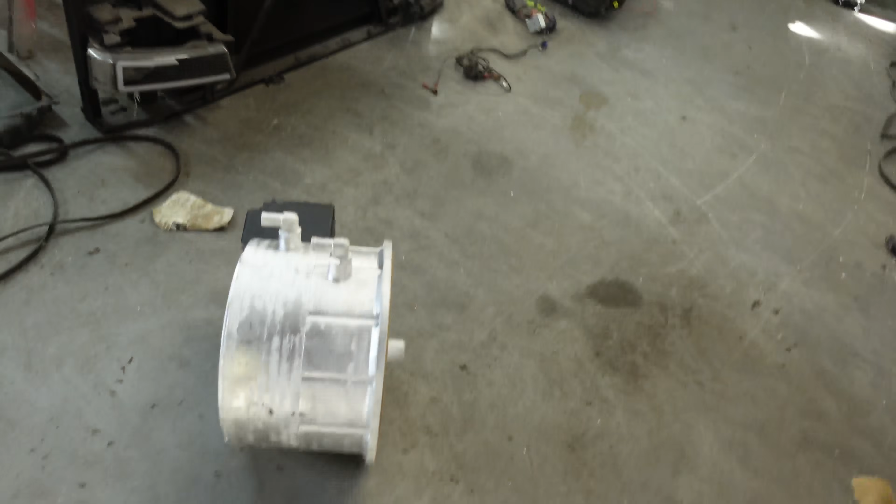Now that we can move the engine ahead because we're done with that manual transmission for the next stage of testing. And look at that, we have a generator here. I know it's not exactly what we need, but it is exactly what we need right now. Let's get into it.

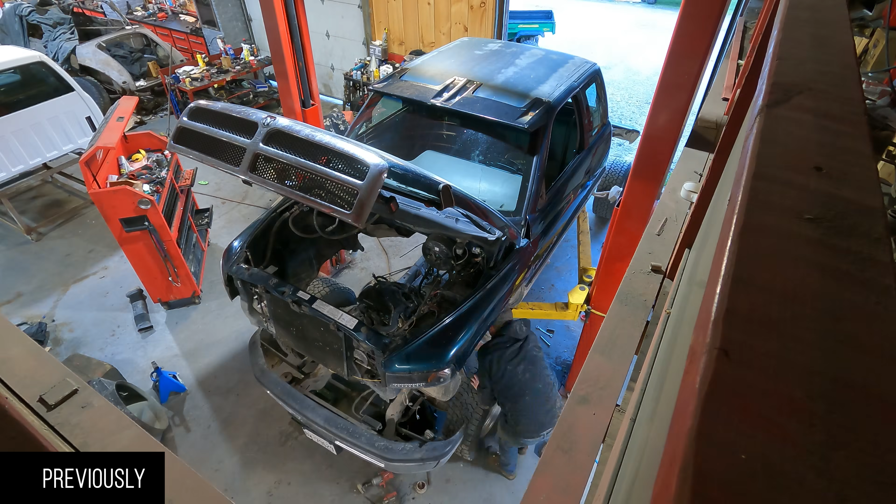First Cummins swap into a Dodge. I feel like we did a pretty good job on her. Definitely SEMA worthy. This is the process that we'll be using to put our electric motors underneath any and every single pickup truck that's been built in the last 6 decades.

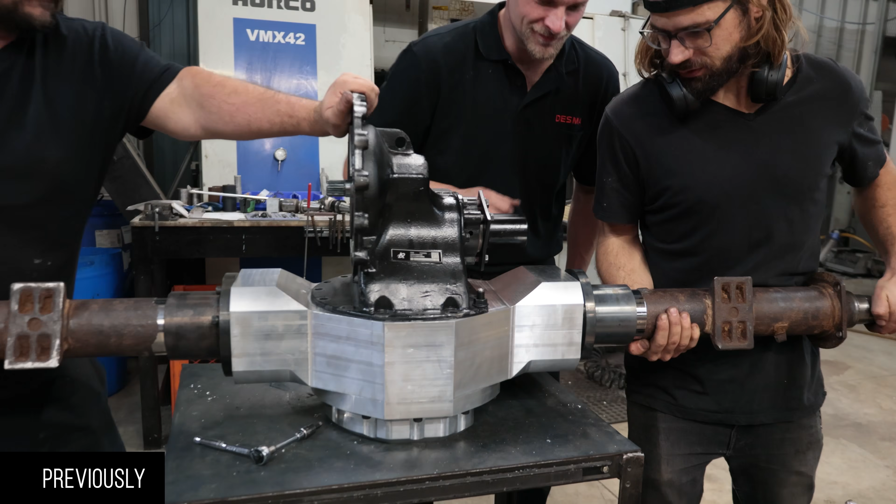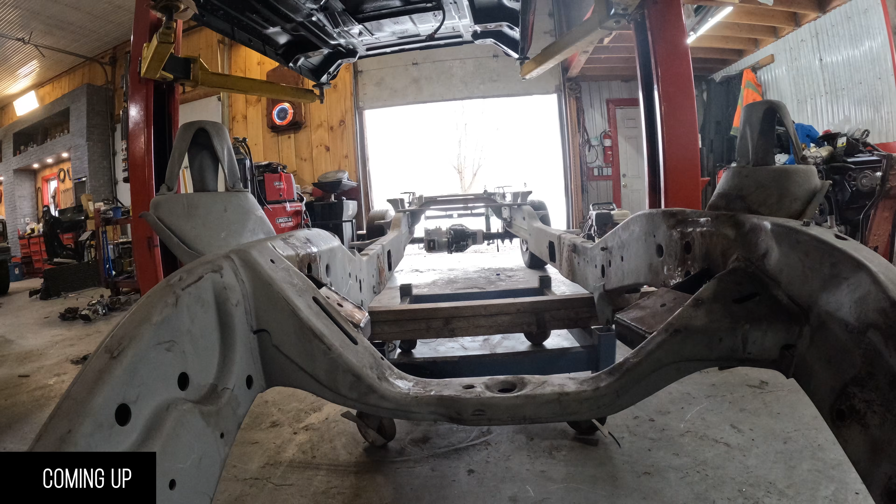Well, here goes nothing. Nice and easy, that's all I wanted to do, make sure that we had lots of room for the engine. We are getting some of the parts designed and made. That means we're waiting on parts. So there's only so much I can do, but we just had the batteries roughly sized, ready for our generator.

We just had this one mocked up. I'm really excited. I was a little worried about the color at first, but I think it is actually the perfect color. Can't wait to show you guys.

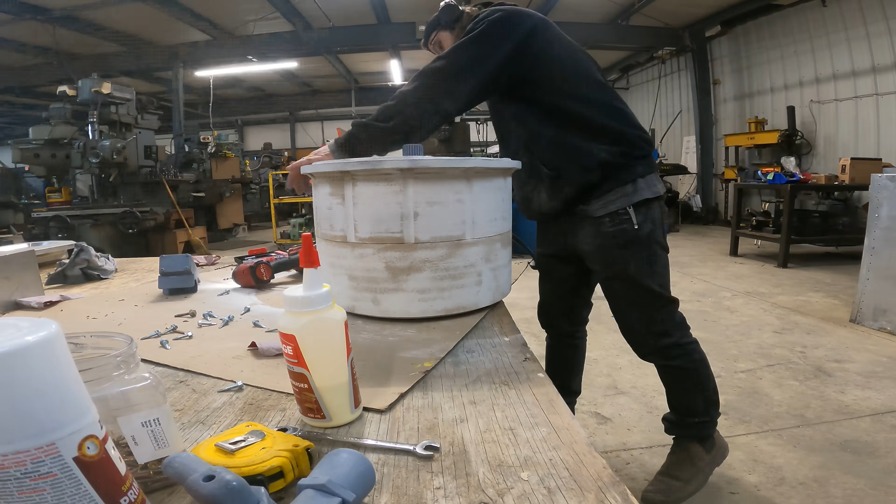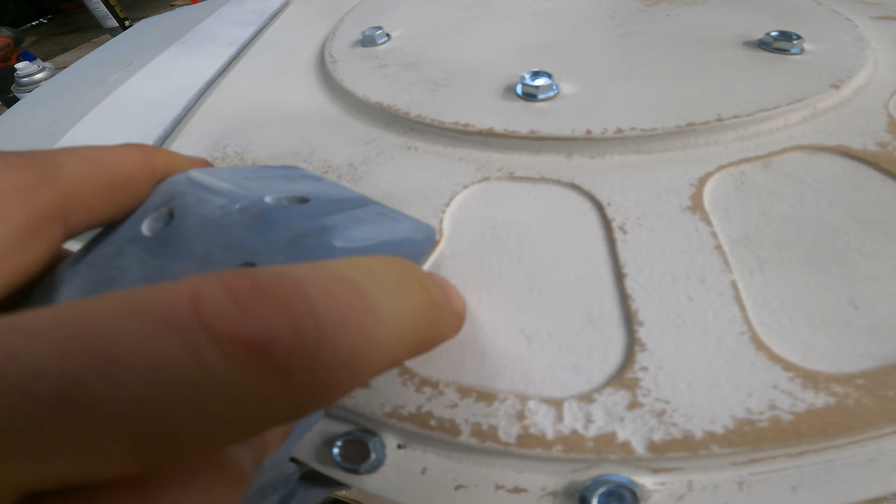All assembled, coolant lines, power out, control in. Looking pretty cool. Now we're gonna give it a coat of paint.

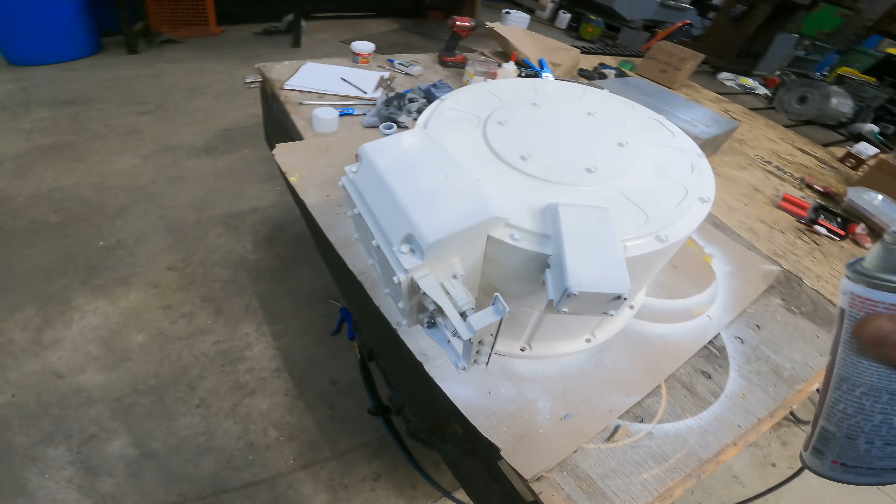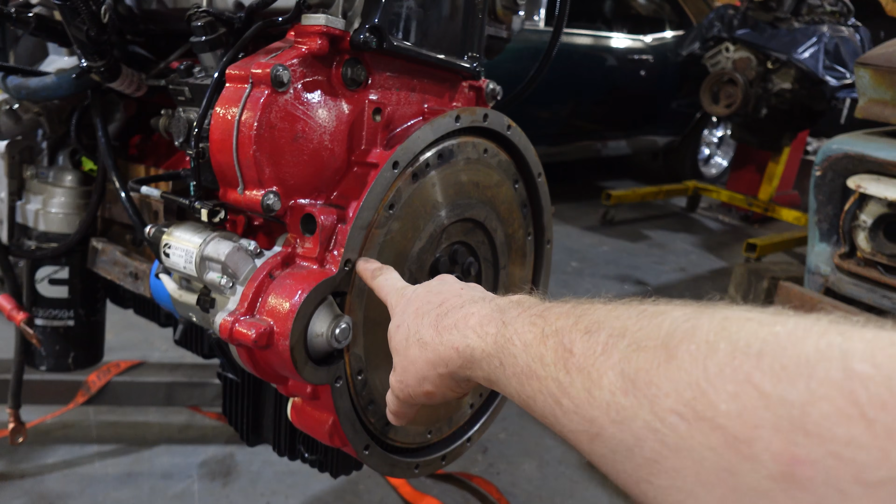So while TNK is making our generator for us, I'll show you that in a minute, but we need to change the bell housing on this 2.8 Cummins because Cummins likes to use their own generic bell housing for this, and it's completely round. It's just an odd size.

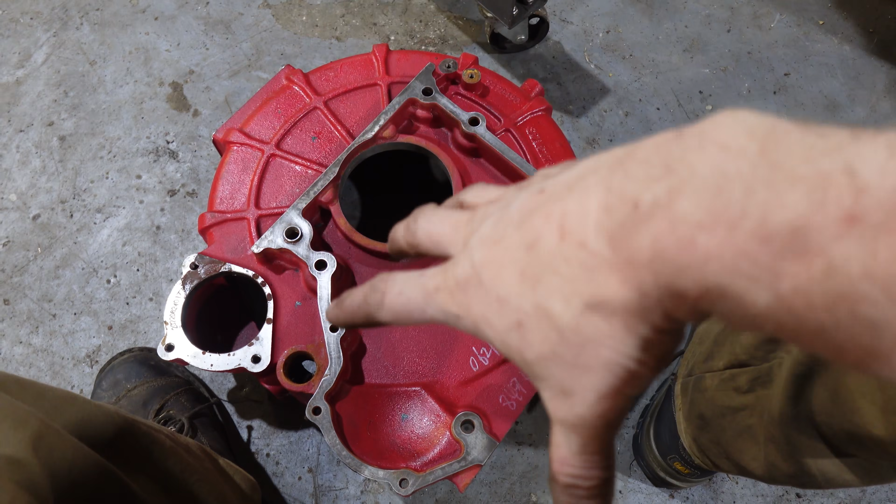So we have an SAE3 bell housing here, and that's more universal because our generator has an SAE3 bell housing. So we gotta pull this bell housing off. I'm not exactly even sure what's all involved in that, but it is sealed, and the rear main seal goes

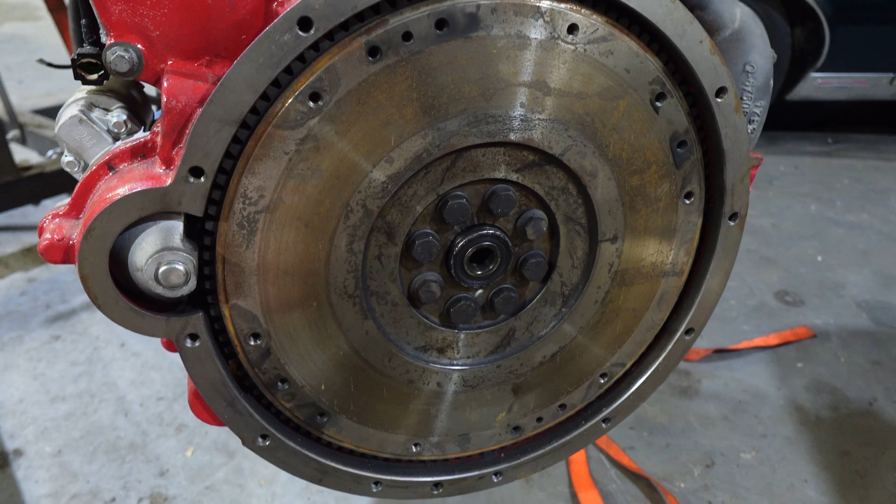in the bell housing. I hate that because it could have just been a nice simple bell housing, pop it off, put the casing behind it with the seal on it. Nothing wrong with that. It's just way more complicated than it really needs to be, but I'm not complaining. Let's take it off. Here we go.

Okay, so the timing chain for the camshaft must go through the back here, which is why this is all lubricated. But the problem is that this is now sandwiched between the housing for the camshaft and the oil pan, because the oil pan also goes right here.

So, good time to take the oil pan off, see if it's ambidextrous, if we can turn those around. What's involved in having to get a front sump pickup tube for it. I hate it when you're doing one thing and you gotta take a bunch of other stuff off to get to it. We'll keep that in mind when we build our own trucks. Here we go.

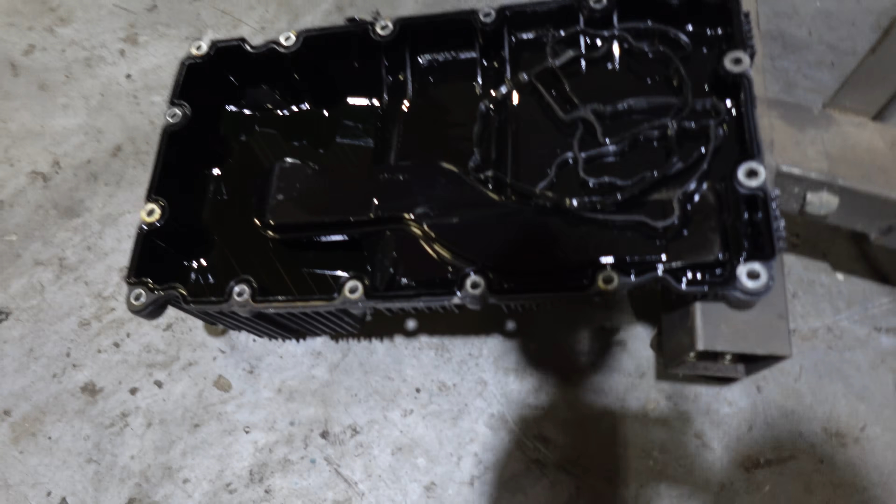Okay, so the oil pan is the pickup tube. So there's an opening right here, and then that pickup is built into the oil pan and picks up the oil. So even if it is ambidextrous, it doesn't matter because the pickup is in there. So we would have to get just the oil pan, but not the pickup tube, which is really nice because

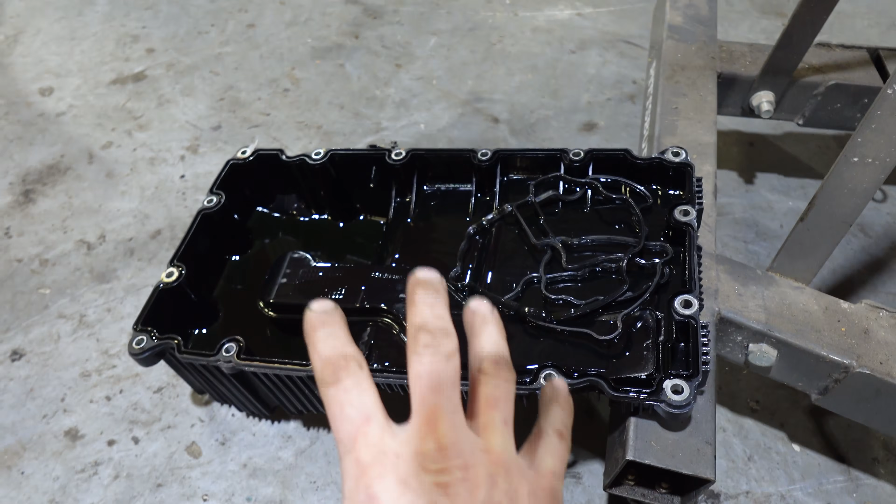we can swap this in tight places, because with the cross member, generally you have to take the oil pan and then stick it down underneath the pickup tube to get it out from underneath the vehicle. But in this case, that's not the case at all. We just drop the pan that 1/2 inch and you can slide it one way or another. You can start spinning it and trying to drop it down right away.

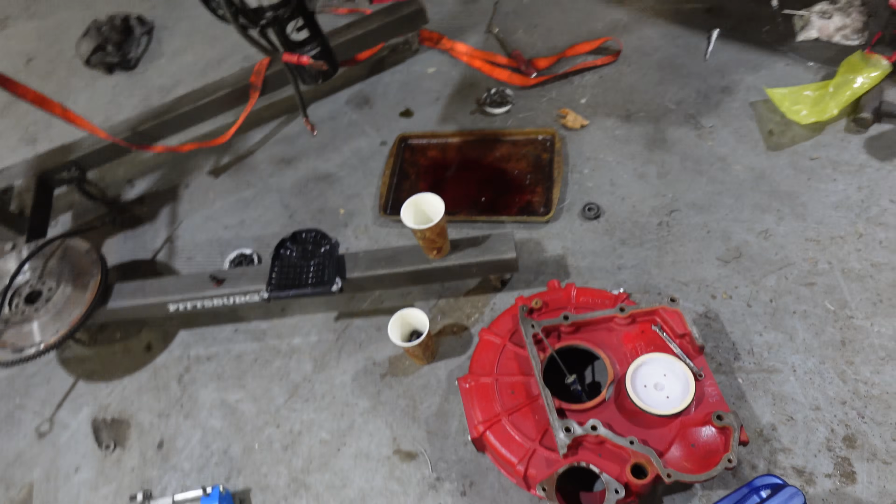So that's nice, but it's annoying because we would need a new oil pan. I'm gonna try and make it fit with the rear sump. And then looking at this, it's kind of a thing too.

This is the seal, it comes with the tool, and the tool centers the seal on the crankshaft. But I still have to push it up against here because I don't want to take all this apart. So I'm not sure if you install the seal afterwards or before, but I don't think I'll be able to.

I guess if I had a nice seal installer tool, that would probably be best to do it afterwards, because otherwise I risk damaging the seal if I lift up. So if I find something, a piece of pipe that's the right size, and I can tap that nice and easy into it, that would work best, I think. Yes, that will be the plan.

I tried looking it up online, but the maintenance and the owner's manual is available, but not the manual on how to rebuild these. We should probably get one of those. Anyway, I think that's a decent plan.

We'll put a tiny bit of silicone back on it and mount that one. After that, we'll install the seal. If it doesn't work, then I take it off again and then do the seal in there on the press and then pop it on, but I think this is safer.

Okay, there it is. Now the seal definitely had to go on afterwards. It popped on really nice. We got just the right amount of silicone leaking out over the side. Got our oil pan back on again, so we're ready for our generator. There it is, look at that.

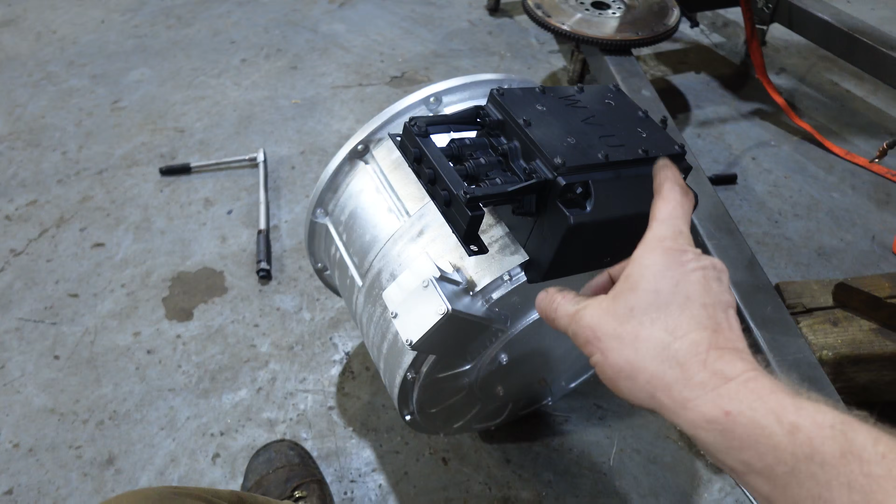Now, I've had a couple people say, hurry up with this project, what's going on? Well, this doesn't exist yet. This is getting made especially for us right now. This is the right size generator that is a good match behind this 2.8, about 160 horsepower, the right size and exactly what we need.

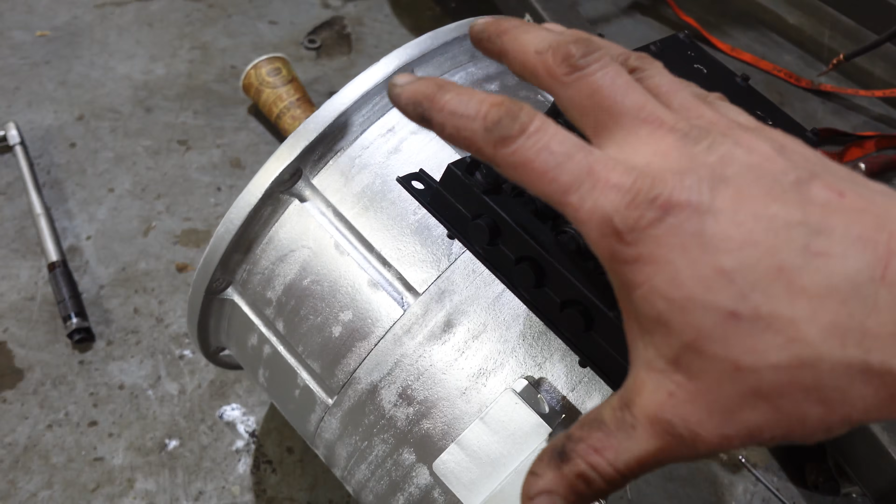So we need a sealed generator with coolant lines on it because we can't just have any generator going down the road. That's going to get all the crap in there from the road. So it has to be a sealed unit, cooled, and this is the right output for our battery. So while we're waiting for the actual one to get made, we just had this one mocked up. This is the size that it's going to be. This is where the outlet's going to be.

The nice thing is we're able to rotate it, so we can put this wherever, but that depends on where the mounts are for the back of this. We might make mounts that go off on the side here that we can just bolt to the bell housing in 3 spots, and then we can rotate this wherever, because in some situations it might be best on the left, sometimes on the right, sometimes on the bottom, sometimes this thing needs to be on the top.

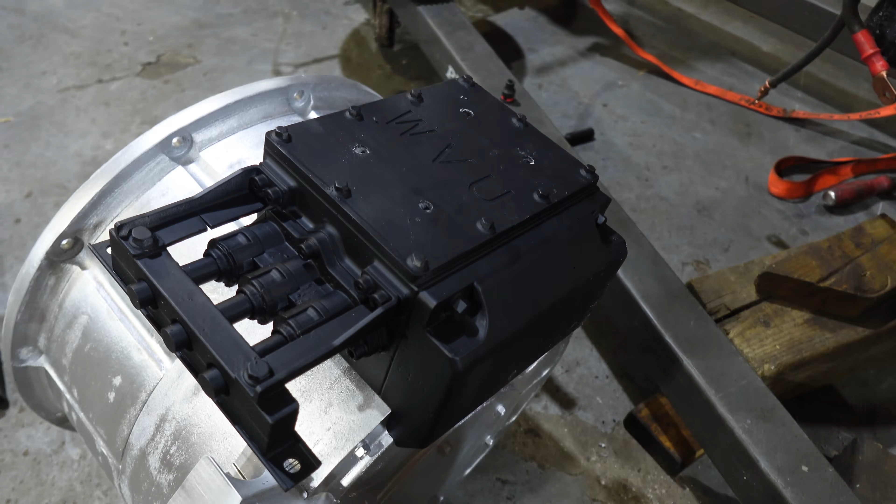But ideally I think we want all of this on the bottom. It's going to be up plenty high. We're not going to hit it with anything. And then that allows for the firewall to come right here. We don't have to notch it much. But I'm going to pop this thing on, and then I need the hoist for a little bit, and then we will figure out how to put it in our frame. So here we go.

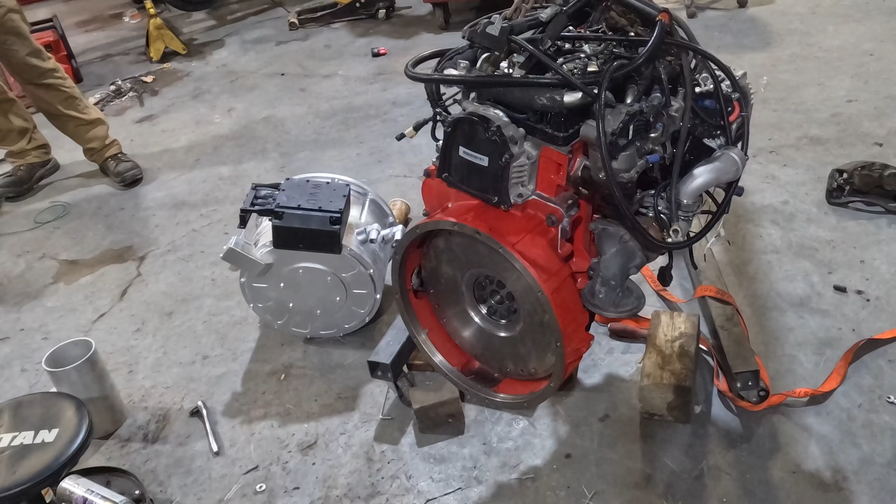Okay, so part of the delays is we're not buying all off-the-shelf parts. We are getting some of the parts designed and made. Part of that is the generator and the batteries specifically for what we need. So we just had the batteries roughly sized, so I know exactly where the batteries are gonna go, figure out the fuel tank situation, cross members, things like that.

But the biggest thing is our cab, and I wanna put this engine underneath the hood with the generator, and then I can figure out how thick of a radiator we can get and how much room I have under the hood for things like the chiller and all of the electronics.

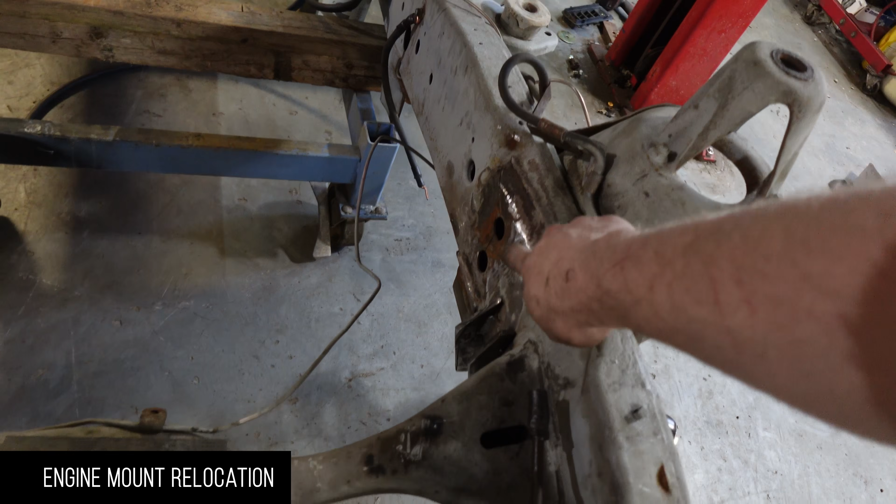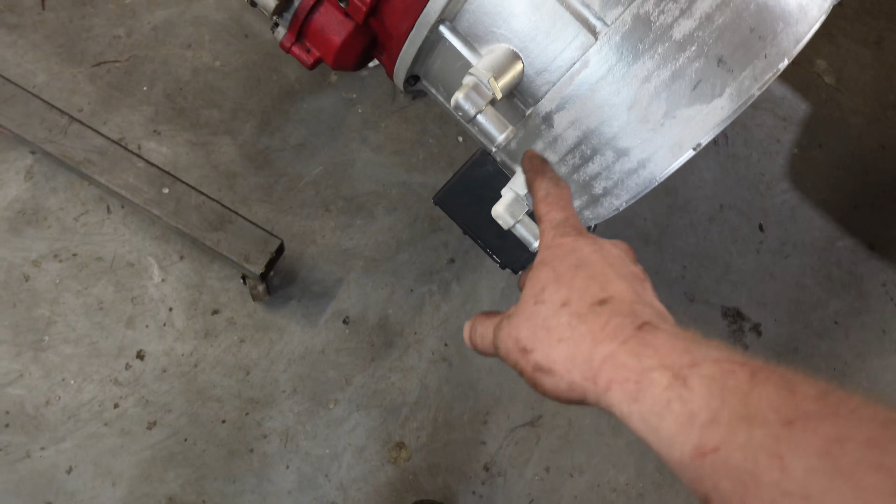So I already shaved the engine mounts off, and the oil filter sits pretty close on top, so we're gonna have to use our oil filter relocate, but that actually comes with the engine. So we've got our generator on there. Now I pointed all the important parts down. We might be able to have the room to have them up.

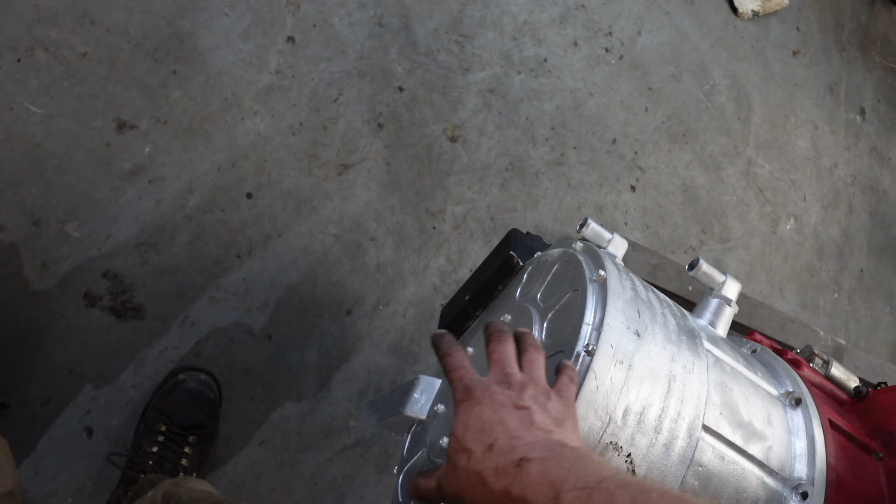It's kind of unfortunate where they are placed, but this is what's available right now. But I think we're getting ours made with it coming off the back and then pointing down. So once it clears the little angle, basically like right here, it's kind of pointing back towards the underneath. And keep in mind, we can tilt this engine however way we want. We can actually stick it sideways, we can stick it off center one way or the other. But we'll place this in there, we'll put the cab back on it, see how much room we got.

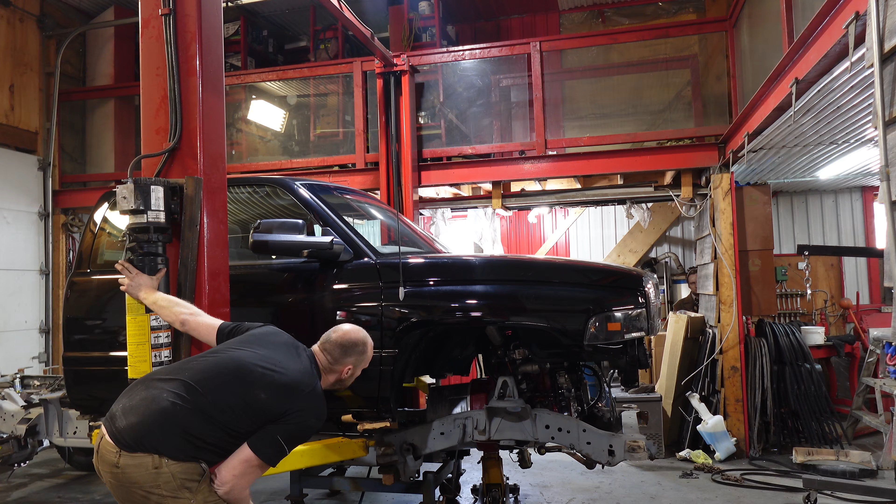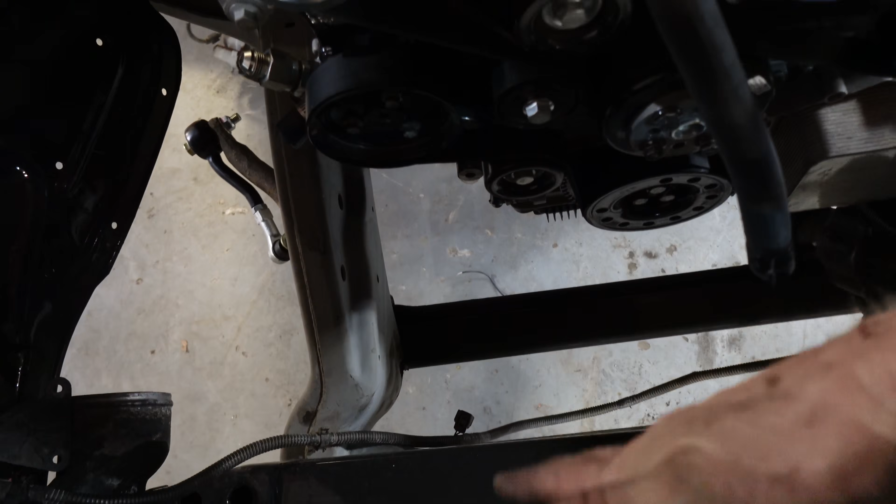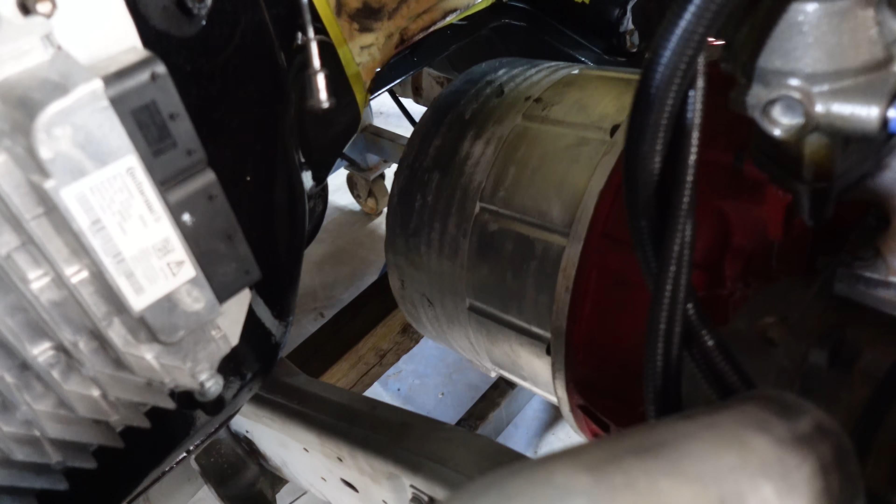Look at all that room for activities. Nice. So I got about 11 inches from here to the front of the engine, but we got lots of room. Like even I can tilt the generator back or down just a little bit. That wouldn't hurt anything at all. And that even leaves room to put the fittings off to the side.

But I think I can bring the engine back like another 3 inches, and that'll give me lots of room for coolers. We're gonna put some oversized coolers on this to start with, just because we don't wanna run into heat issues off the bat. We wanna test the rest of the system. We can make the radiator smaller. It's better to go too big at first and realize that we're overcooling than it is to undercool. So we're getting some pretty significant radiators.

So we've got the AC condenser, then we got the air to air for the engine, then we'll have the EV cooler and then the engine cooler. So the EV cooler will run at about 35 degrees Celsius, so under 100 Fahrenheit anyway. But then when the engine kicks on once in a while, it's going to run at your typical engine temperature. So we've got medium air only sometimes when it's running. Then the EV cooler gets most of the surface area. It's a very nice big wide radiator, so we're very confident in it.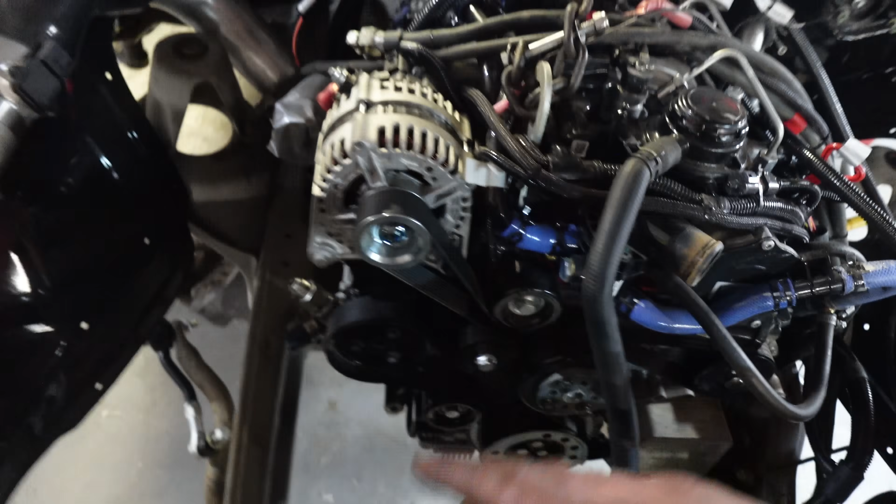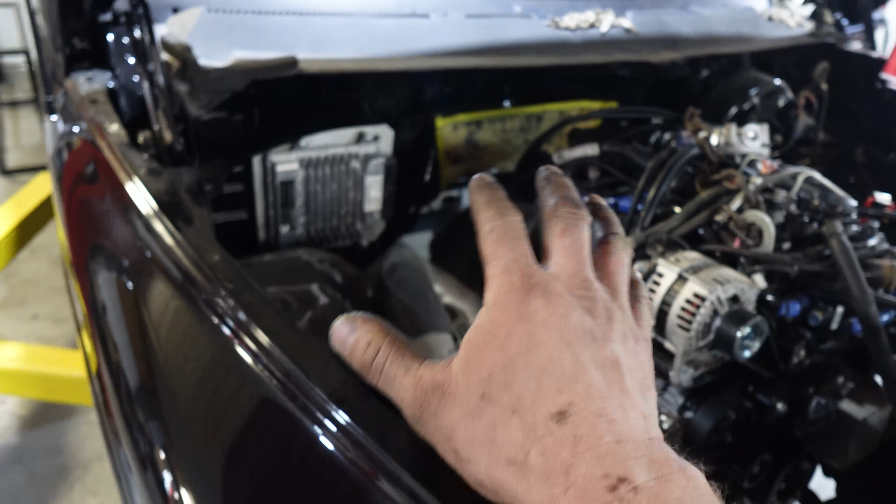And then we're going back. Unfortunately, we didn't need to cut that spot out for this firewall. Like we got so much room here, we can put that engine right back. So we're gonna weld that back in again. I still have the piece. Not a big deal because we're going to soundproof this entire wall, and we're going to remove this entire interior. We're going to put a 4th gen interior in this too. So yeah, moving right along.

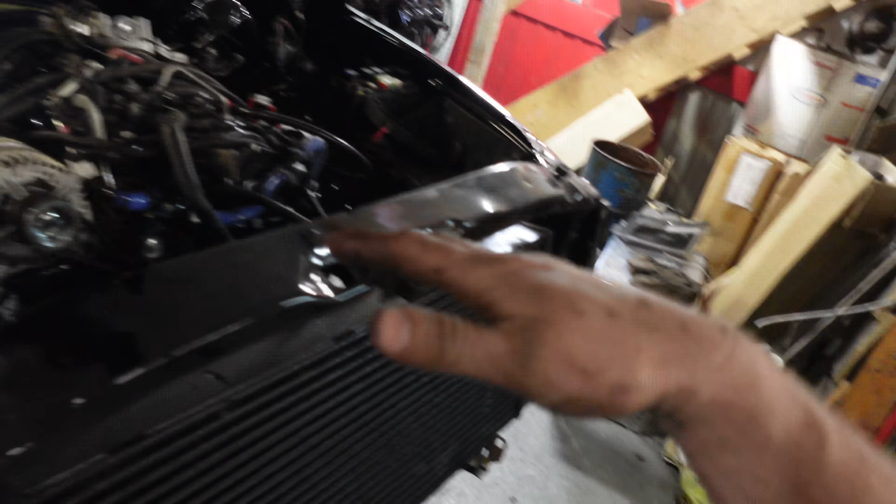We'll pick this thing up after break, coffee time. We're going to pick this thing up, slide it back as far as we can, and then hold it in place while we figure out our mounting system, which is going to be Mercedes little gel mounts. So these are the kind of gel mounts for Mercedes. I think they're gel. They're a pretty good fit actually for right in here. So hopefully they'll compress a little bit, and it's basically just a little plate to hold them in place, and that should work very nice.

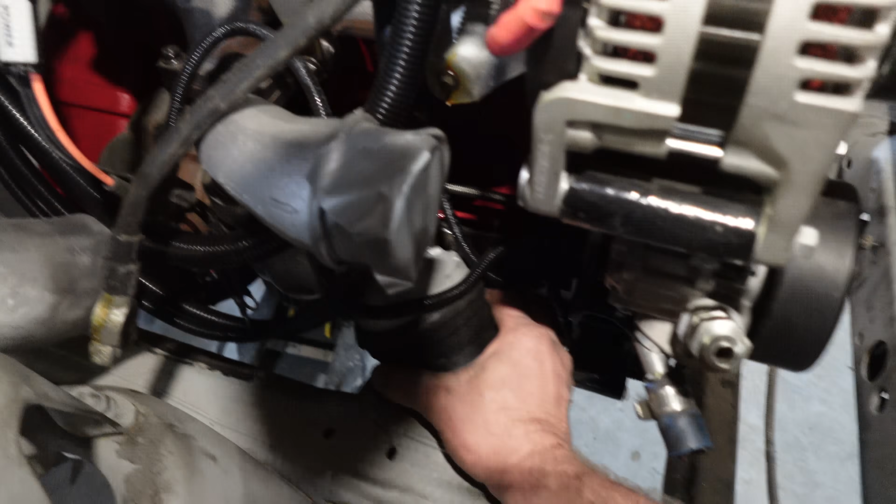And we've got the slit down here even to make it adjustable. See the slit? There's the slit. This is gonna work so nice. Okay, so I got that engine mount in. I got a little bracket made. I'll pull it out and show you guys closer. But basically, it's too far back, so I'm gonna have it basically as close to that corner as I can while I can still get on it and tighten the nut from the bottom.

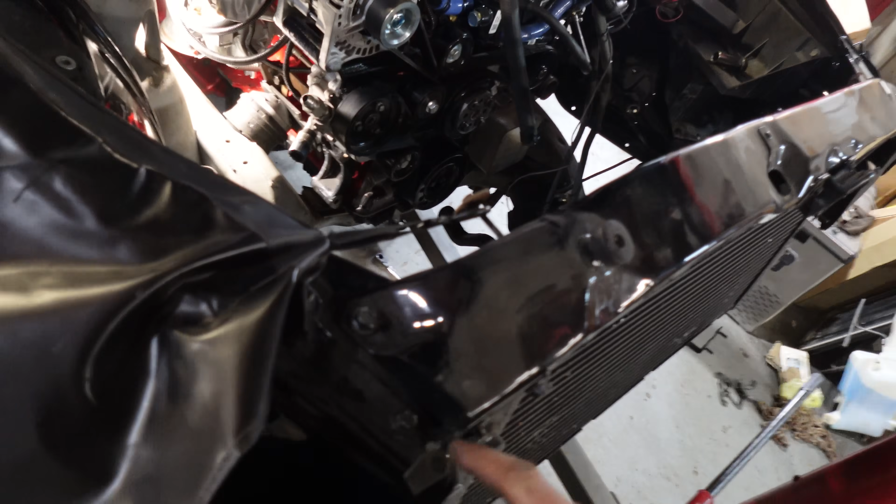So I can take the cab off. Again, I think the easiest thing is probably to take the rad and this upper mount off, the intercooler, and then I can go right out the front, and I don't have to support the engine and take the cab off. So it should be pretty straightforward.

Okay, so there's my engine mount, which is just a piece of C-channel with a hole cut in it so I can get out the bolt on the top, and for weight savings, obviously. And then a cheap little Mercedes mount, $30 from Amazon, and a piece of flat plate that I'm just gonna tack in place when I have the engine sitting where I want on both sides.

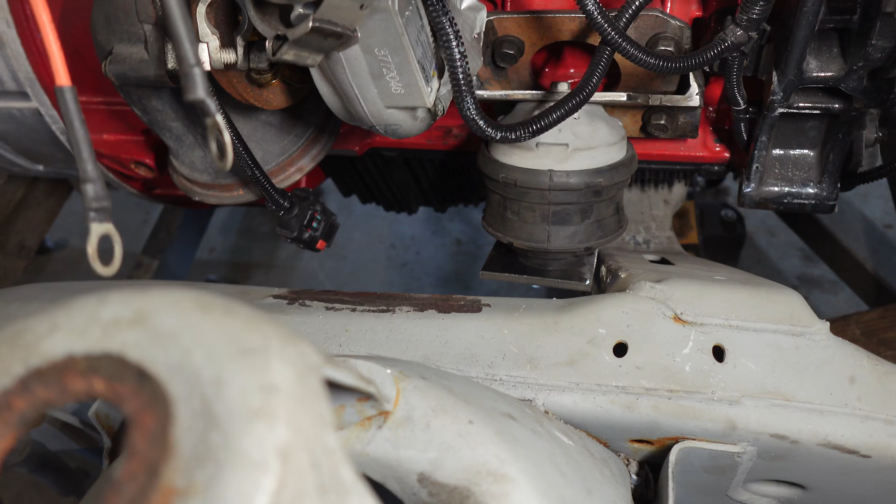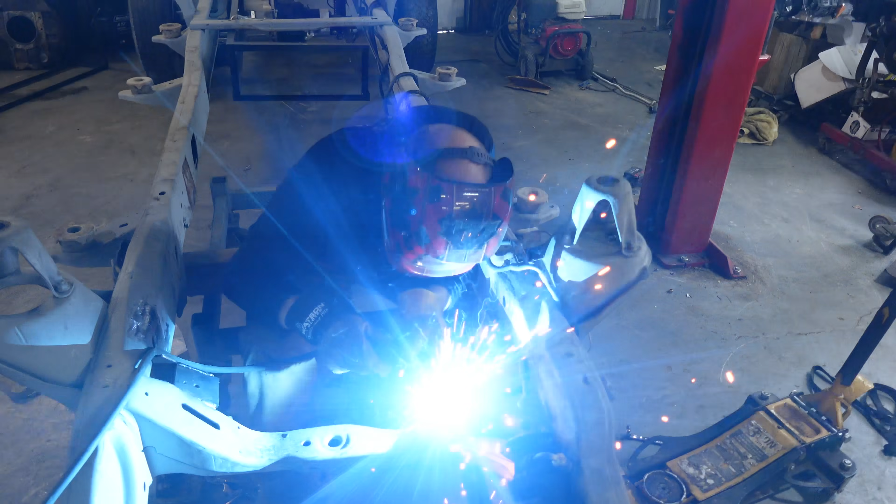And now imagine this. Imagine that Edison actually makes it, and we turn into this big giant company that I know we can be. And somebody finds this 20 years later and goes, holy crap, that's the first original Ram. And then you start looking at it, it's like, isn't that just angle iron and C-channel and the grinder and a welder? Yep, absolutely. And you know what, it works. So thanks B&R for used steel here and there now and again.

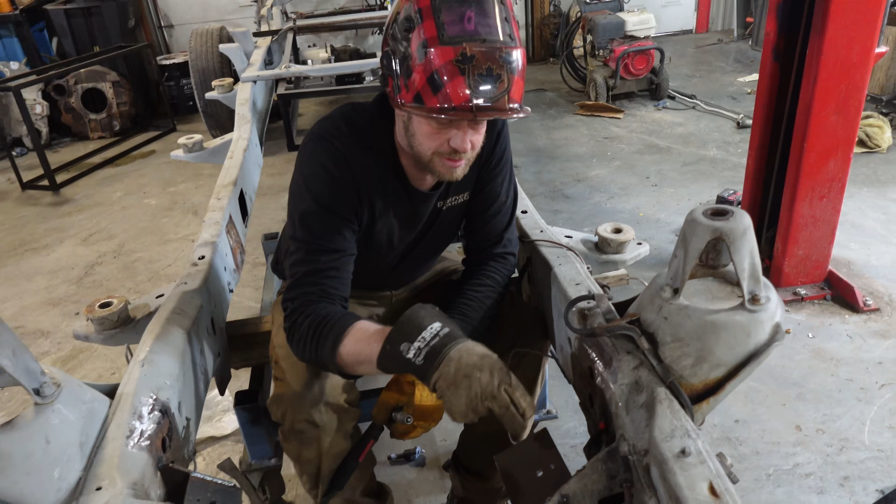We're gonna weld this thing in place, and then we'll get at these horns, and then we're almost there. So I'm gonna tie this bracket into this bracket. Just gonna kind of extend that up. It's kind of an afterthought. There are no mistakes. I totally did that on purpose. Just happy accidents. And I'm not very good at welding upside down. So I'm just gonna take the whole frame and flip it upside down and then brag about my upside down welding when it's actually right side up because it's upside down.

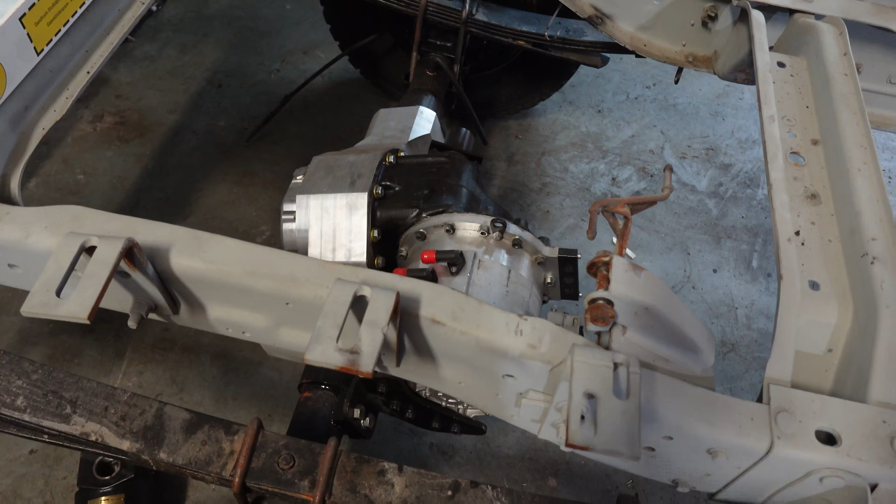Okay, frame is stripped. I'm gonna take the back axle off, and we're gonna rotate those saddles just so that we can drop this motor down just a little bit. Tried to think ahead, and that one backfired, so now I gotta spend an hour fixing it. But that's okay, not a big deal, we'll get it.

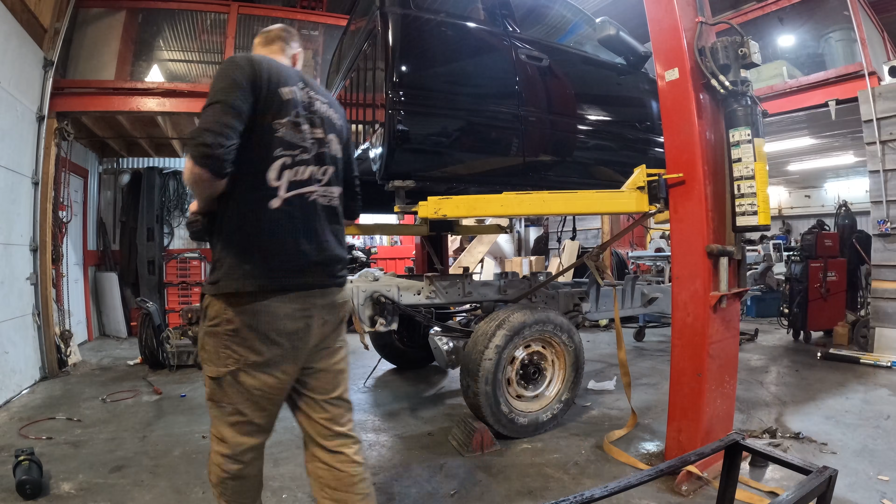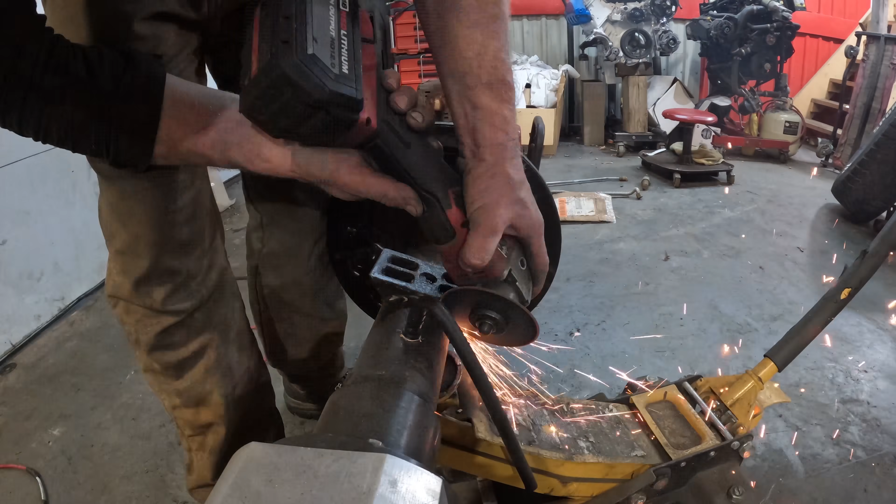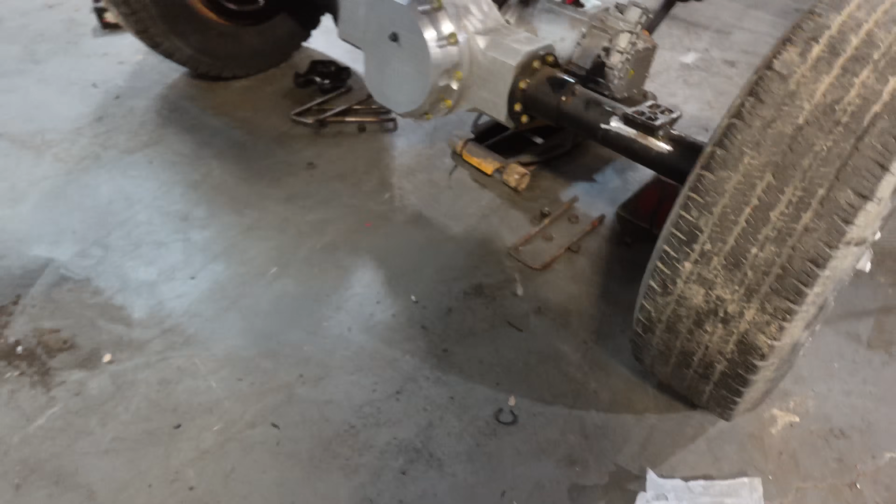So those plates came off really easy, just with a cutting disc. Just cut one strip there, and then cut the pieces off, and just a little groove in there, and then a hammer, and it tapped right off. So I welded that one on. I left this one loose. That way I can drop this thing back down on here, and then that'll have the right spacing, and it'll have the right orientation, and we should be good. Because yeah, can't really rotate, and it'll find itself.

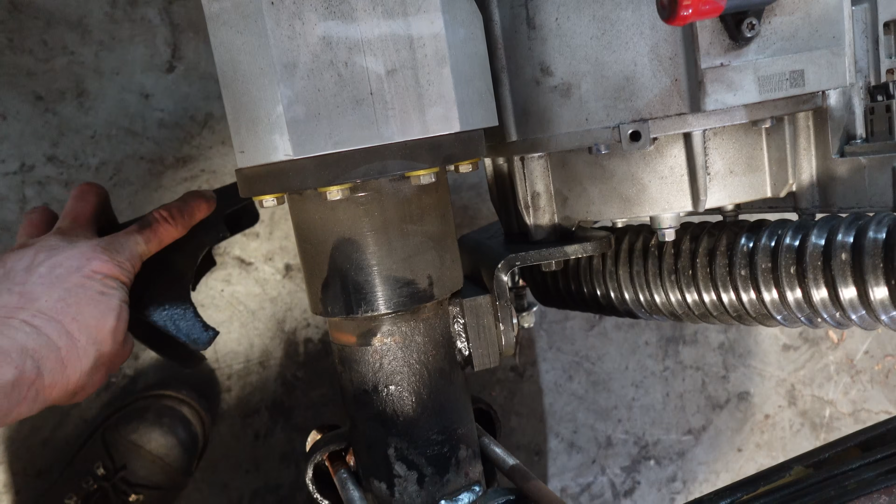Okay, so we gotta put the shock mounts underneath, but half of it goes onto the top hat, so I just have to trim my little half moon section here. And this will be a load-bearing bracket to help hold the axle tube to the top hat.

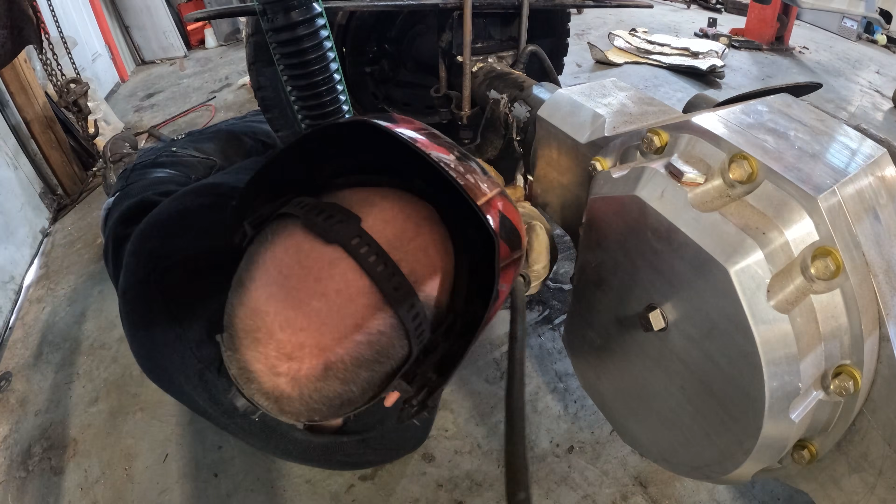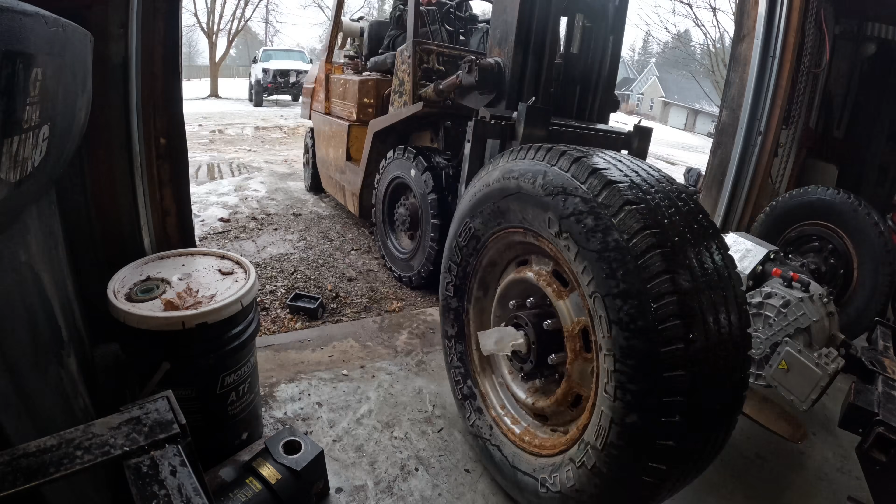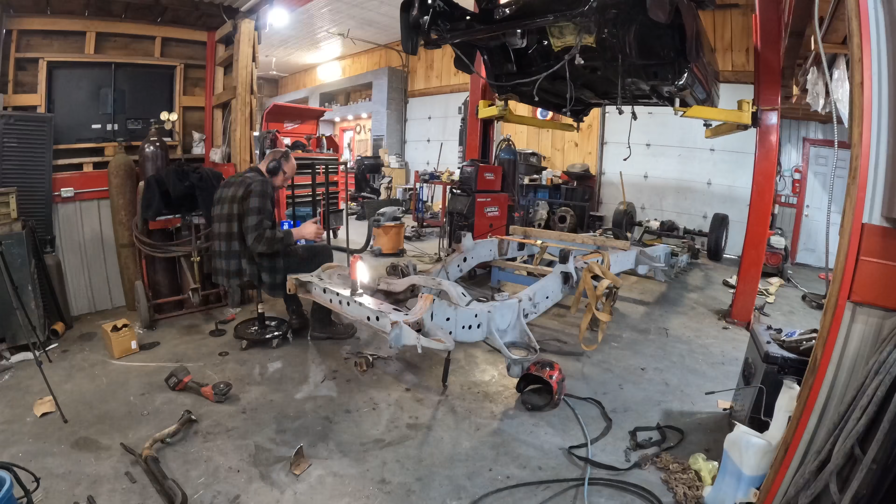So I can cut that little corner out of my two-wheel drive, because this was the four-wheel drive setup, and that was from Ontario. The back half of the frame was from BC. So the front half of the horn is the same, but all the mounts for the suspension are different. So that's why we grafted this four-wheel drive into the two-wheel drive, knowing I had to do this little repair.

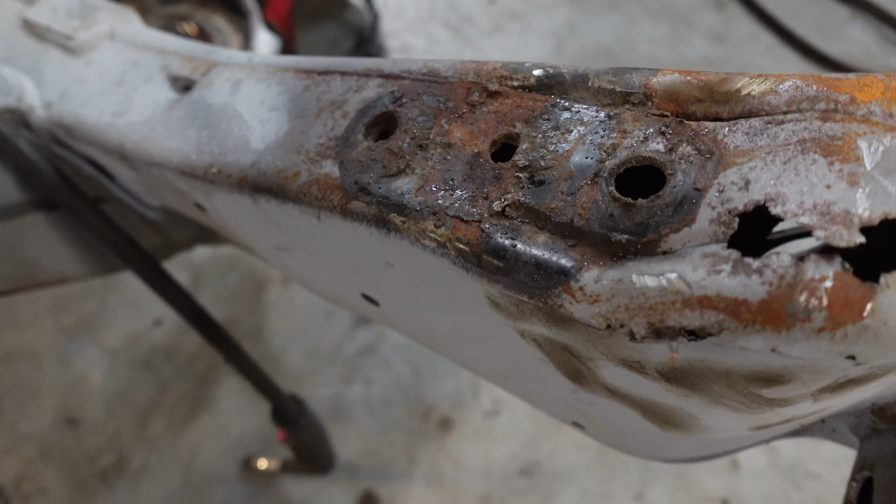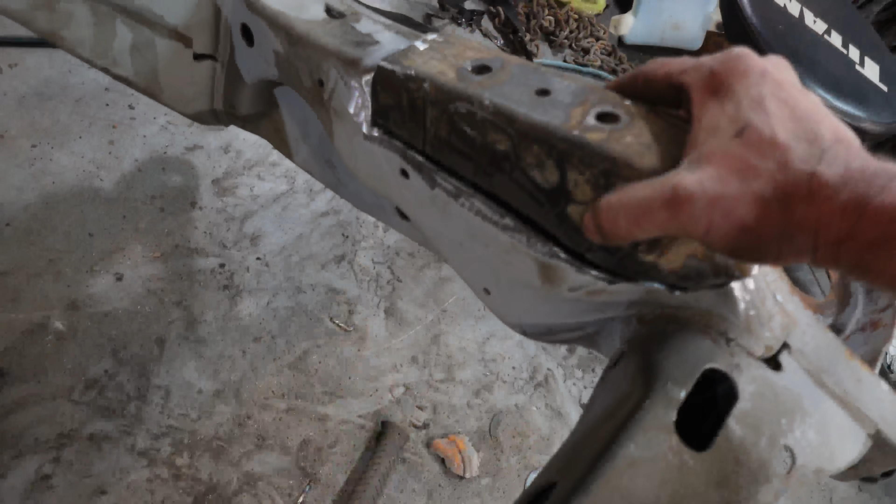Grafting in one of these things that has like a corner this way, a corner that way, a corner this way, it's very tricky because you think it doesn't fit. So what I did was cut it in half and then lay the piece on top, and then I'm close to where my thing is, but I still give myself extra, and then lay it down and then keep cutting with my cutting disc and slowly dropping it down until it's in the right spot.

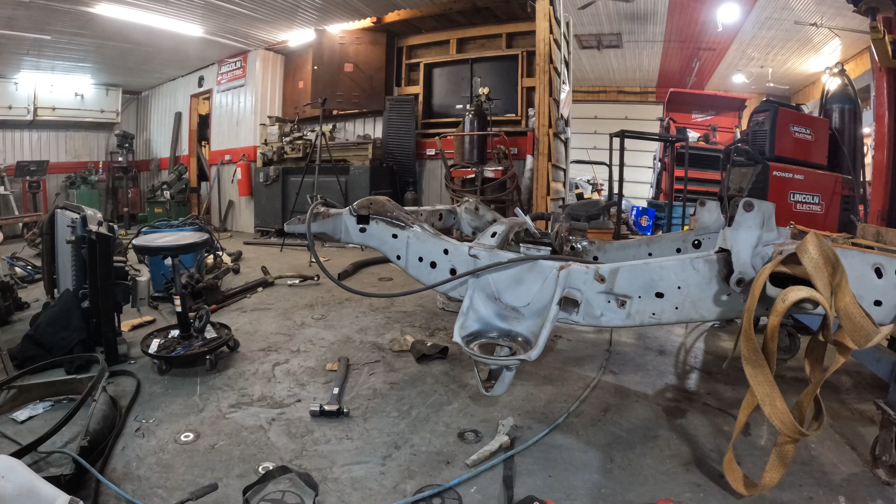And I like having just that little bit of a gap in between here, just the width of the cutting disc, because that lets the weld go down in and catch both sides really nice. And you think that, you know, it doesn't fit right. You really have to imagine that because the corners are all on an angle, all these lines are on an angle, that just because you cut it to make it fit doesn't mean that you don't cut it too much, because the angle cuts back, if you know what I mean.

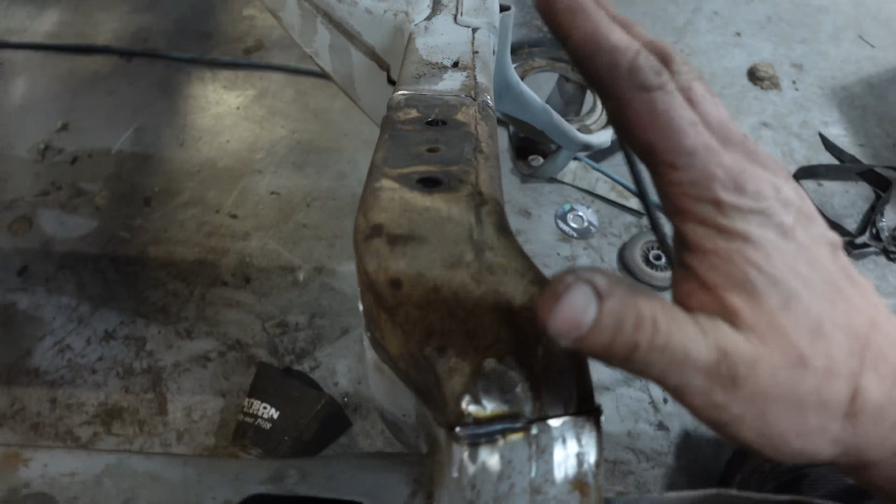Take your time when you're doing something like this. It's worth it to just make an extra bunch of cuts, spend that extra 10 minutes, because it's hard to bend this thing and make it look stock. It overlaps, it's got two nuts here, it's got curves going every which way. So it's nice that we had that good two-wheel drive setup outside that I could cut from, but you only get one shot.

Now, I didn't undercoat it on the inside just yet because we're gonna paint it, and all that oil will run out and then cause all sorts of havoc with the paint. So we're gonna splash some paint on it, and then we'll undercoat, or we'll put some Fluid Film on the inside of the frame, the inside of the horn.

And honestly, they need to have a weep hole here just to get that water to run out, with like a cotter pin in there. If you stick a cotter pin in there, the cotter pin moves around, keeps the hole open, and then lets that moisture escape. Because on both of these, the water sticks here, there's no way for it to come back out. So you get water in through these holes here and the holes back there, and it can't come out. But if you stick a cotter pin in there, then it just kind of bounces around. The wind moves it, keeps that hole open, and gets rid of that moisture.

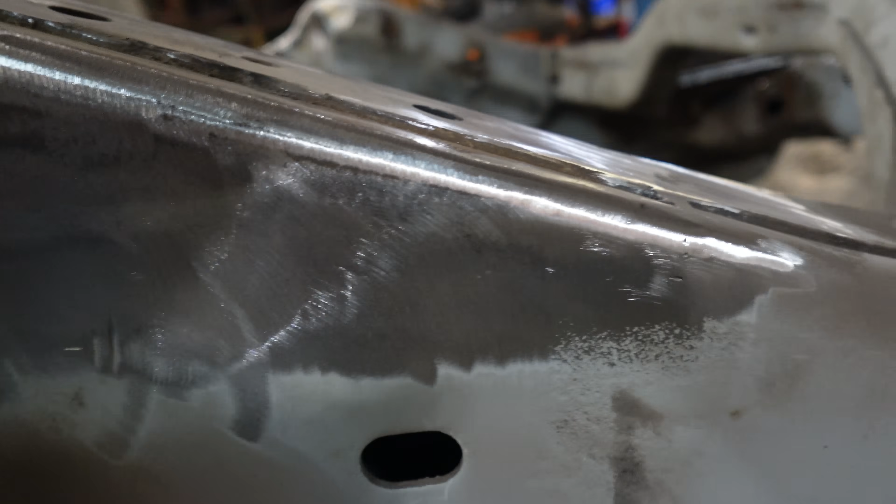It's late at night, it's 20 after 10, and I must have done something wrong, because it is Friday night and I still have a tiny bit of gas left. I should have run out right around 4 o'clock, just not in time to go exchange that bottle for a new one. But I got all my welding done and I still have some gas left over, so probably forgot to do some welding.

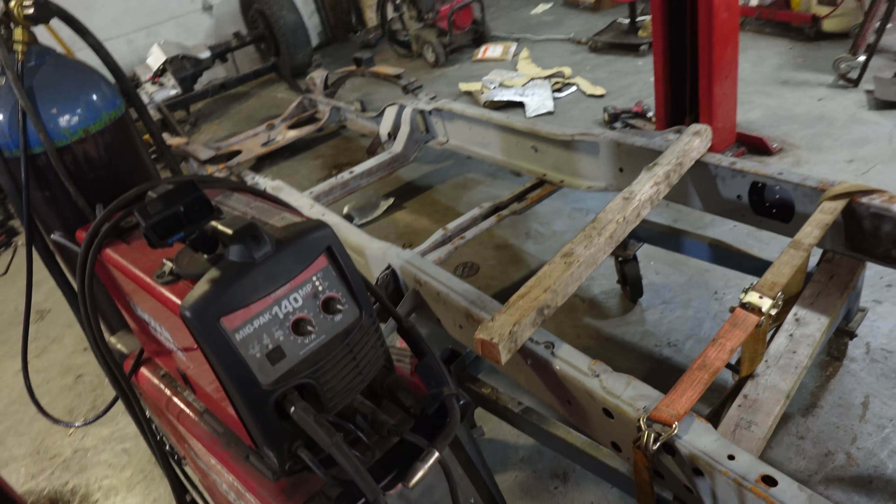Anyway, that's it for this. We're gonna wire wheel the bottom of this quick, throw a little bit of Rust-Oleum primer on there, and send her off to paint. Actually, I might even just let them do that. They got a fancy gun and they'll just touch up the primer. I was running out of primer, so the very bottom of it didn't get as much coverage as I would have liked.

But I'm very happy with the horns, how those turned out. My mounts look fantastic. I added another little brace here just because. Now there's 2 of them that run, so that's suspension mount and then my engine mount, all tied in nicely together, and it looks wonderful. So I think that's it.

I'm gonna go to bed. We got a snowstorm. I gotta go clean some snow in the morning and then drop this thing off at the paint shop. All right, you excited? Yeah, I'm a little excited. First time seeing one of these for sure.

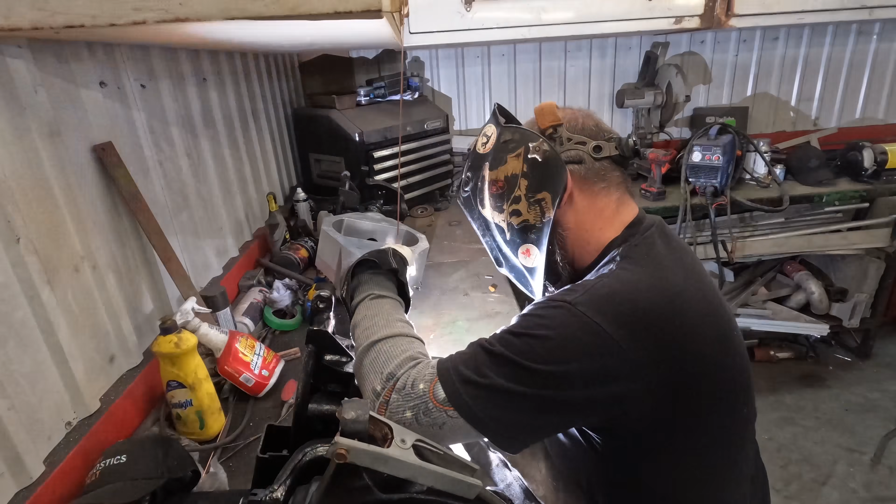Yeah, we're gonna paint her blue, strip her down, pull the axles off, pull the wheels off. We've got new leaf springs coming. Paint the hitch black, and then give her back to Rich for some more work. I'm really excited. I was a little worried about the color at first, but I think it is actually the perfect color for everything. We're gonna head over to T&K and check out the front axle to show you guys the color that this is gonna be as well. So let's head over there now.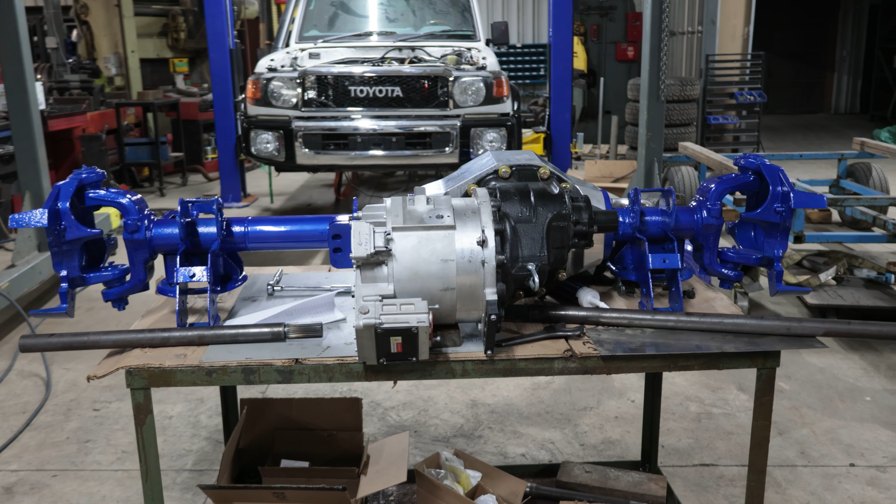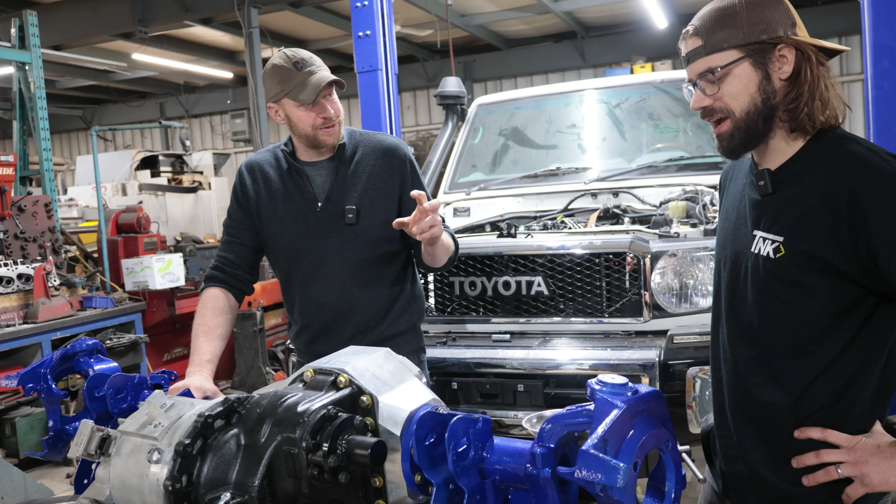As you remember, this was in the last video when Chase and I put this underneath the Ram, but it was just tacked together, basically just for fitting and making sure we had everything in the right spot. Since then, you've basically almost finished it. So close, you could taste it. We were waiting on a few parts to come in, and they finally came in, so we can finally get the axle shafts in there and actually take that power and throw it to the wheels.

We had to make sure that the spider gears were perfectly centered in here. Yep, and then there's a seal right here. So there's a shaft seal inside of what we've been calling the top hats. There's one on either side, of course, and so we gotta basically take these new axle shafts, turn them down, make sure that everything's fitting perfectly, and then we got to get the length right and put our knuckles on there. Okay, so we had to get these splines cut.

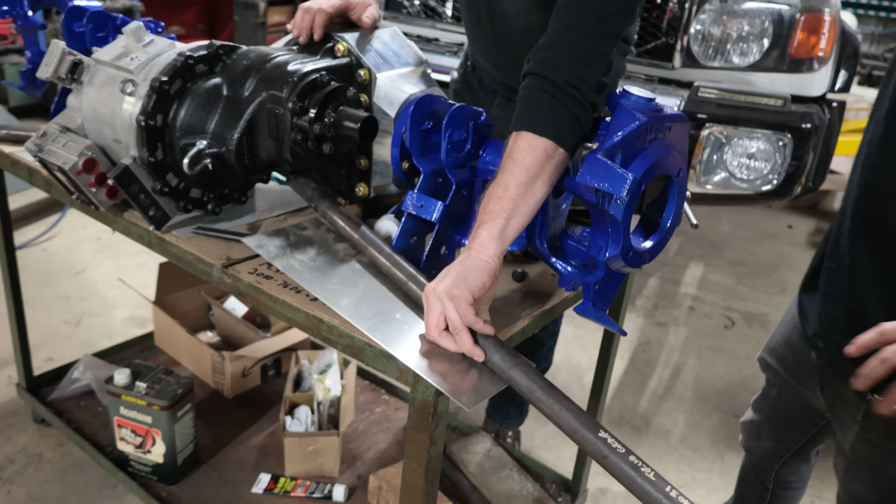These are for the Chinese spider gears in here. That's right. And these look pretty hefty. Yes, there's a lot of meat there. If you compare it to what came out of this thing, it's big. And so that's flame hardened.

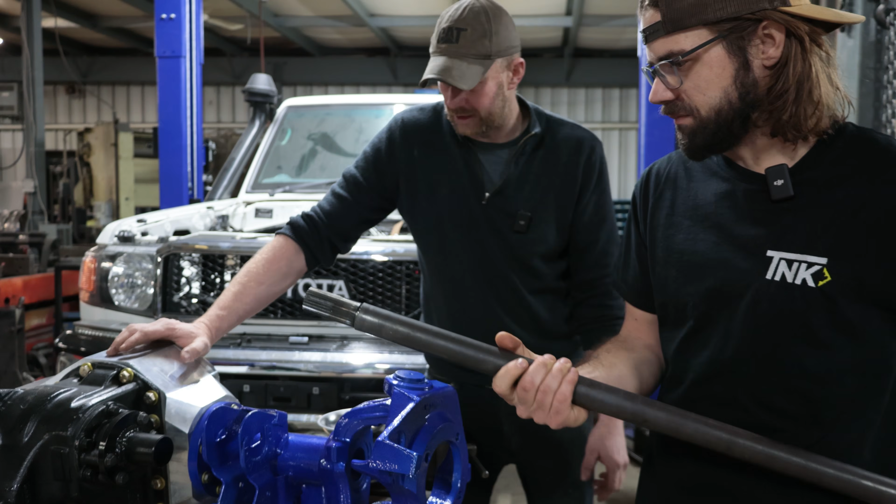And then we put the yoke on there for the U-joints. Yes. And then we're able to put all our brakes and our hubs and everything back in. Exactly. That's just the final close touches. You gotta machine this for the seal.

Yeah, so this guy needs to come down, at least part of it needs to come down so that it fits the seal properly. This actually is for that side, the longer side. Essentially, we only need, I'd say, like 8 inches, because it just needs to come out to here, where the seal actually sits. And then the rest of it, we can do whatever we want with, really.

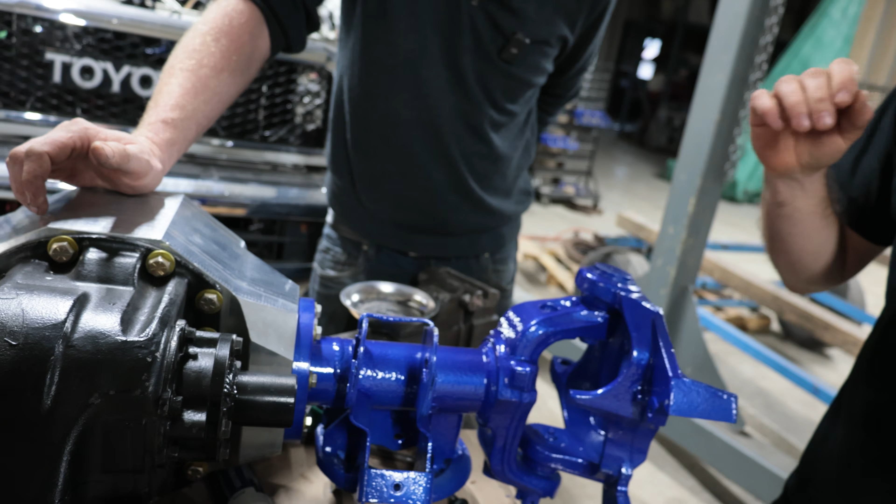Nice. So that's happening while the frame is heading off to Ontario Truck Rebuild, and it's going to get this same color. So all the suspension pieces, the heavy-duty 4 links from Synergy Suspension, plus the traction bar and sway bar, all of that is going to be this blue. I think we're going to leave this black. We're going to leave that black.

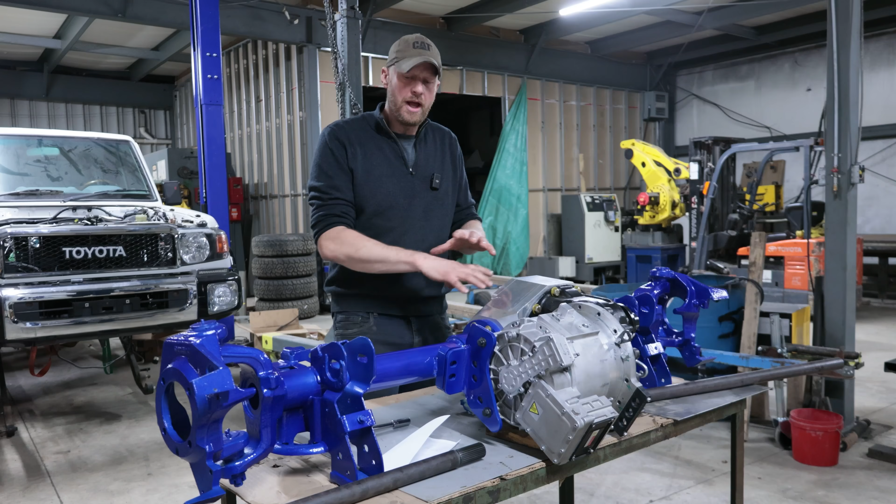Just because. All right, so this is the heart of the Ram project, but I just want to stress that this is not going to be in the kits that we sell. So this was a theory to see, is it possible to take the stock axle tubes and suspension mounts and mount it to an electrified axle? But as impressive and beautiful as this is, we're doing this just to prove the rest of the kit.

There are no axles that fit our North American market, which is why we made our own. What we're doing is proving that the engine, the generator, the batteries, all of the electronics talk to each other, don't overheat, and move the truck down in a reliable manner with regen working, with generating working the way that it's supposed to. And then Dana already makes an S110 axle.

So as soon as we drive this truck over to British Columbia, and it doesn't matter if this leaks or it vibrates a little bit or the tires are wearing a little bit, that's irrelevant to what we're trying to learn. As soon as the rest of the kit works, we're going to start putting these kits into 450 and 550 axles, because that is a stock Dana axle that's already electrified with your stock brakes, stock suspension, stock hubs.

We can start getting these kits rolling out in a very cost-effective manner while we are doing the prototyping for our dual motor, which is a lot more compact, doesn't have this giant weight on there, doesn't need traction bars to keep the axle from flexing. It's all going to be a much more compact system. We're excited about that, but that takes capital to be able to invest in that.